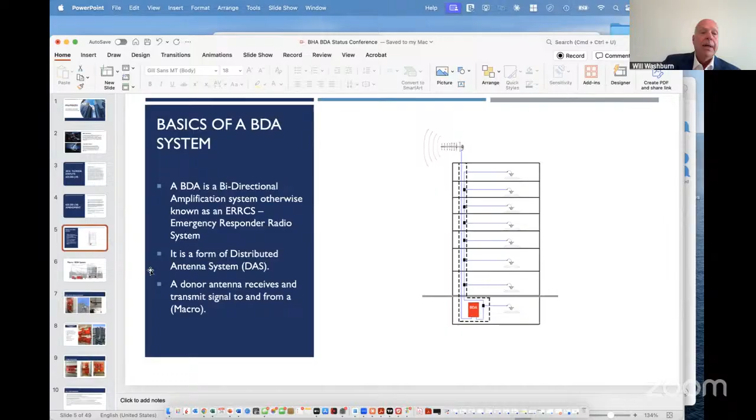So the BDA system distributes antennas throughout and has a donor antenna on the roof that communicates back and forth to the macro system, or what we refer to as the municipality. And it is bidirectional. The signal comes in through an amplification system and is distributed through antennas that are placed throughout the building in a lot of your critical areas like elevator hoistways, stairwells, fire pump rooms, fire command centers, and what have you. So the system operates on a bidirectional basis.

It is not a peer-to-peer system. So if multiple firefighters were in a building, all of their transmissions actually go out through the donor antenna to the macro and then back to maybe somebody on another floor or fire command or somebody outside the building. So it's a seamless communication hub that allows our first responders to communicate inside these buildings.

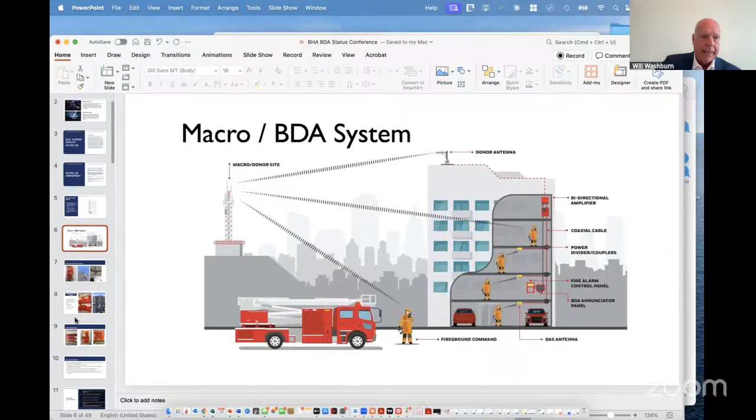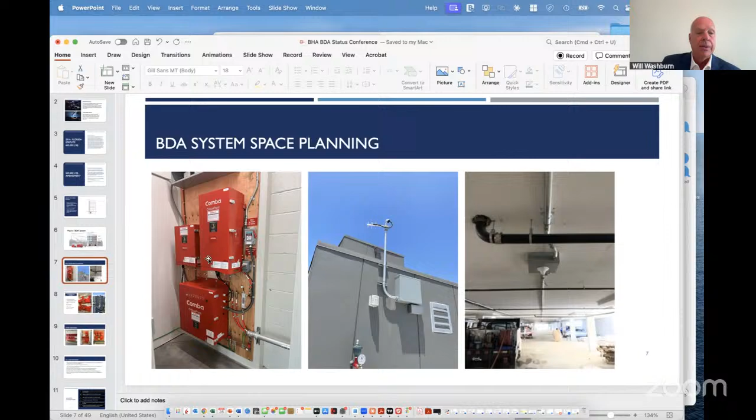And this is what it looks like. This is some of the equipment that's installed in your head end. This is your little donor antenna that communicates with the City of Miami or Miami-Dade County or Miami Beach's communication system. And this is an antenna per se in your garage. And it takes different complexities.

For instance, when we did Icon Brickell, you can see the head end. It required multiple systems because there's multiple towers, and it's what we call a fiber DAS. But it was just a massive undertaking. The building's 3.8 million square feet. We put in 14,000 feet of coax, 16,000 feet of JPLR coax cable, antennas, Yagis, hoistway coverage. And so these are very intensive infrastructure, and there's a lot of code surrounding how we can install this and what kind of fire ratings our pathways have, as well as what kind of signal strength is required throughout the building.

So I know a lot of you folks are returning customers, so I'm not going to spend a whole lot of time on the structure of the bidirectional amplifier. As my message today is, let's talk about what's changing. We've done a lot of these installations, but there's still quite a few left. But there's also a maintenance and monitoring requirement that we continue to be engaged in with our customers to make sure that these systems are performing to the stature that the city requires, as well as not interfering with their macro system. Because if one of these BDAs did interfere with the macro, it renders the system inoperable for any.

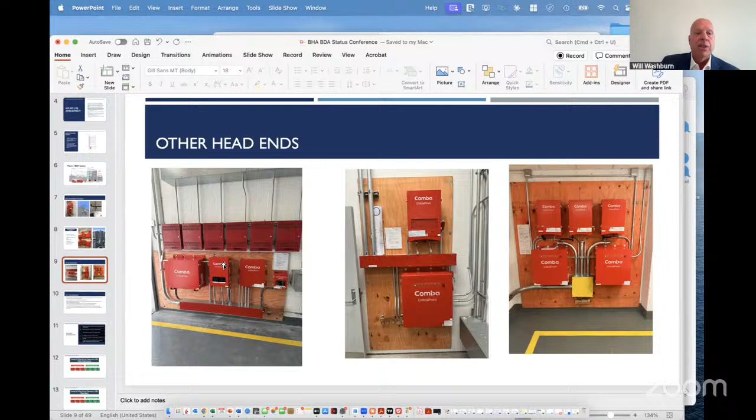And because this is life safety communications, we really need to pay special attention to interfering with the macro, and that's where a lot of the change is. So let's get right into some of the code revisions. Now, whether you had your property mitigated or not is a discussion of code compliance. But once you complete the process, there is a maintenance and monitoring requirement that we're going to discuss here today because it's getting stricter. But here's kind of a broad brushstroke of the code revisions that I think are worth mentioning.

The City of Miami, Miami-Dade County, and Miami Beach are starting to cite those who are not in compliance. Now, if you get cited, they're going to fine, and you're going to be required to go in front of a special magistrate to discuss why you're not in compliance yet and what you're doing to get there. They didn't do it last year. So they were giving folks leeway to get proposals from multiple different vendors, find the capital to fund the infrastructure, and actually institute the build. So they've been very flexible.

That's changing. They're all now out banging on doors, finding out if you have a compliant system, testing in your lobbies and your elevators. City of Miami's not even announcing it. They're just coming out and going through the building independently to try to determine whether the building has a system, and if not, why, and furthermore, if you do, they're testing it.

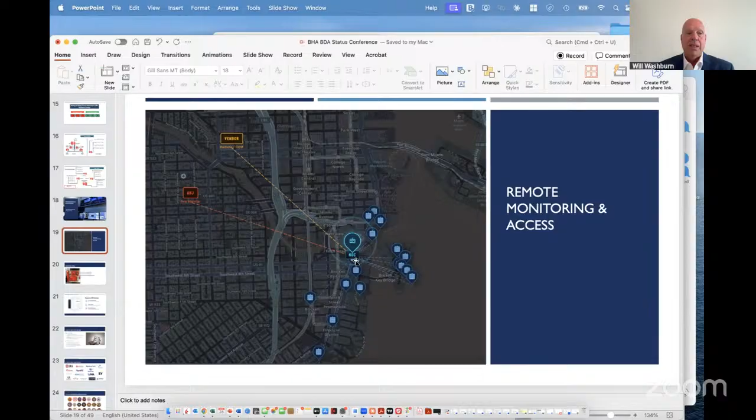And it saves their network from being out of service for that amount of time, while they used to run around to each building with an Anritsu and a Yagi trying to find the interference. So this is one of the big drivers of why they're making this mandatory, that if you build a system, you have to install this little item. And this is over here at Bristol Tower. This is one of our beta sites.

So one of the new requirements is that when we build this, you, the building owner, have to bring us a network circuit, which is a 100 meg network circuit. We originally rolled these out with wireless access, as you can see, but they weren't as consistent as possible. So they want these to be hardwired into the circuit. So it's a pretty innovative requirement that they're enforcing.

And we like it. We think it's good because it gives us more control over all those buildings that we built, and we will get notice immediately if there is an alarm or if there is interference or oscillation. But more importantly, it's going to tell us, hey, this property is coming up for the annual inspection on June 16th. Your annual grid test is going to be due.

Please conduct it and upload it to the document repository. So that's a big part of this because the city didn't have a document repository. So it's a benefit, but it's another cost.

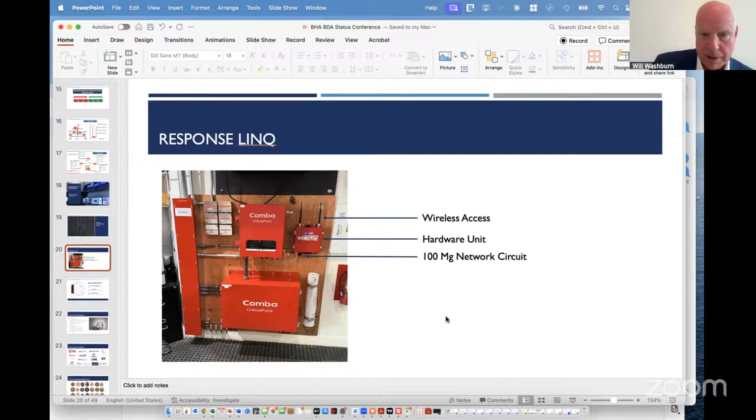We charge a premium for our maintenance and monitoring, but we're doing the work. We're doing the annual grid test and we're doing all the things that are required. So a lot of buildings are out of compliance because they really haven't done those annual grid tests. And so this is the most significant change coming down the pipeline here. And we've got several months for compliance, but it's an addition. And as Roberto said earlier, this is not grandfathered. I can show you here. Everybody see that?

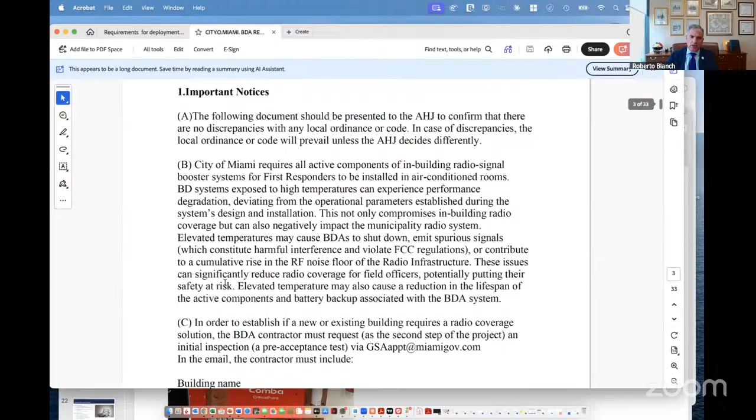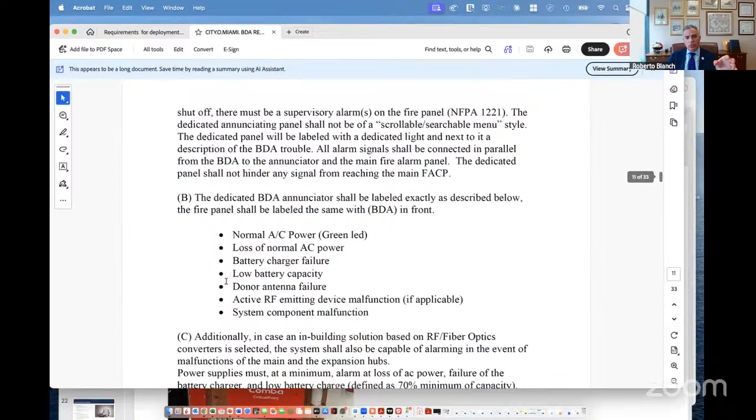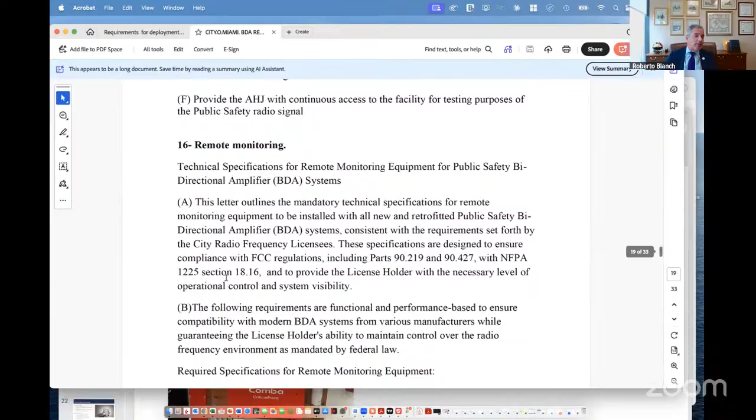While you're showing that, Will, I also recognize one of the things you mentioned earlier, which is that some of the AHJs are beginning to enforce compliance. And we've seen this before, right? I mean, many years ago, when we had the recertification requirements and buildings would not timely comply with them, they get a notice of violation. If the building doesn't comply, then they get sent to the special master or to the unsafe structures board, depending on what the authority having jurisdiction has.

And in the worst case scenario, in a lot of these types of issues, municipalities can impose fines. In theory, if the building is considered to be unsafe for occupancy, God forbid, they could even shut the building down. It's not my experience that municipalities are in the business of shutting buildings down and kicking people out. But it is important for our listeners to know that in some unique set of circumstances, that is a possibility.

And I have been seeing as of late more of a trend by the municipalities to start enforcing a lot of this, and to start getting buildings into that special master track where they're being forced to appear at hearings, provide progress reports, provide hearings to demonstrate to these authorities having jurisdiction that the associations are moving in a path toward compliance.

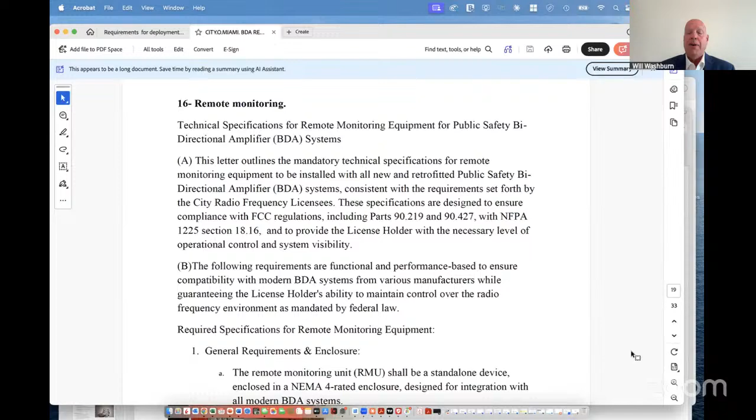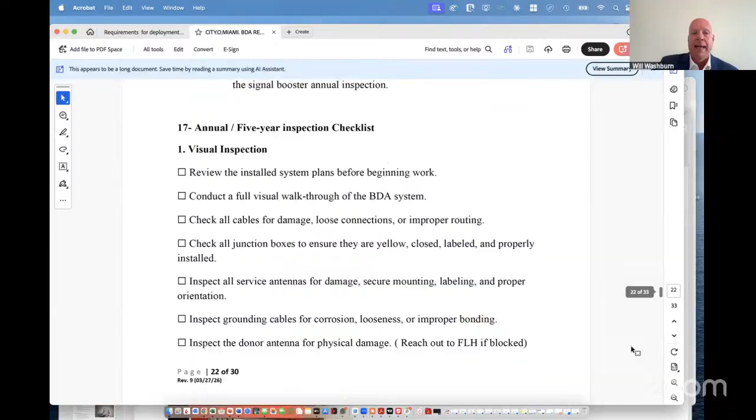And what's happening on that front is they all attend this conference up in Orlando, and they're all comparing notes. It used to be Broward was the toughest jurisdiction, and they started sharing their notes with everyone. So they're coming up the glide slope of compliance on this. But this right here, this remote monitoring, occupies 4 pages in their latest code compliance. And look at the inspection requirements. This has to take place annually, and they have to do a 5-year inspection.

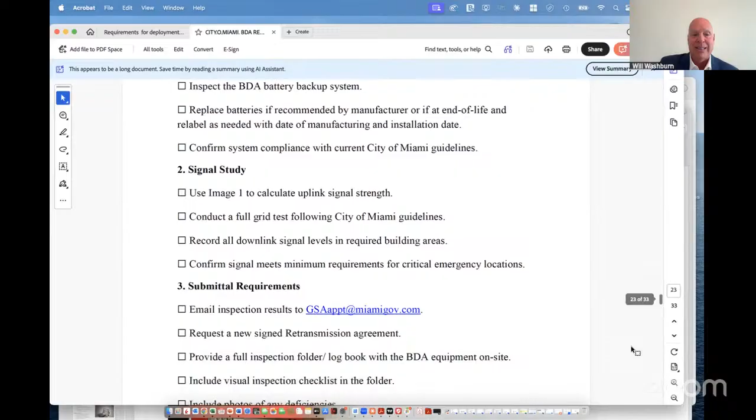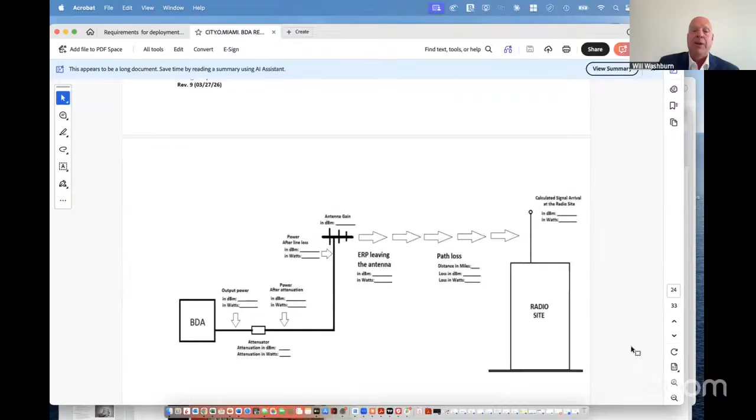So not only is it coming up to compliance on getting it built, but maintaining the system. Look at all this required. And by the way, this is best practice. This is what we've been doing since the onset. We actually set the standard on this because our goal is to keep it from interfering with the macro and doing its job, which is seamless communication when a first responder has to come into the building for an emergency. So you're absolutely right.

These are costly items, but the marketplace in Florida is quickly becoming one of the tougher jurisdictions regarding enforcement on this. Where before, back in 2016, 17, 18, and 19, they were a little lackadaisical about it. Those tough compliant markets were reserved for San Francisco, California, and Seattle, Washington. Miami is taking the lead now. So they're taking it pretty seriously.

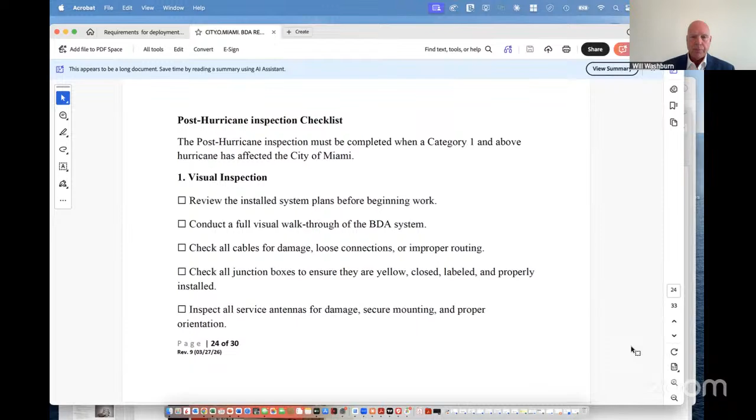Another thing, while we're on this subject, is I've had board directors of property and property owners say to me, Will, we don't have the budget. We'll do this when we get fined. Well, that day has come. So if you're one of those holdouts, certainly get engaged with the contractor immediately because it is going to result in fines and citations and special magistrate meetings.

So it is upon us, and the fire department's taking lead here in the city of Miami, and this is one of their initiatives that we think is good for the industry because it's protection for the first responders and allowing their communication systems to be unfettered by the activity that the legislation required to build all these BDA systems. When you get a concentration of these, if they're not engineered perfectly, they can even interfere with each other. So this is all real time enforcement actions that are happening.

And we as a builder have to deal with this every day. For instance, in the city of Miami, we didn't used to have this equipment in a conditioned room. Now it has to be an air-conditioned room. We're putting mini splits to accommodate. Wasn't in the original bid, wasn't in the original permits, and so forth. So I think the thing that you stated, Robert, was there's no grandfathering here. This is a dynamic requirement, and we're going to have to pay attention to it and make sure you're compliant every year.

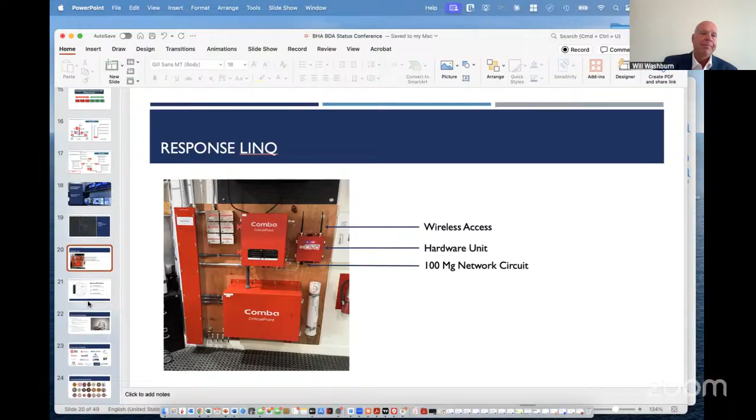One of the other changes is up to the authority having jurisdiction. So originally, the National Fire Protection and International Fire Code had the threshold of passing at -95. What that means is it's the relative strength of a signal, and it's measured in negative numbers. So -95 was the threshold. If you were -95 or better, and you did a grid test and all your grids are green under that threshold, you pass and you don't have to mitigate it. If not, then you have to put antennas where it's not passing and mitigate those areas.

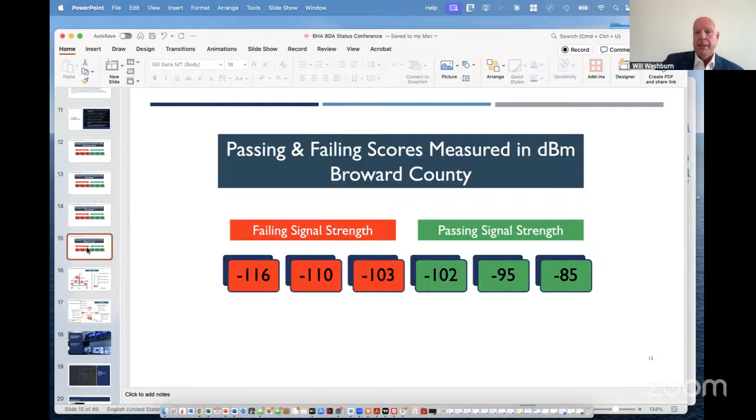-95 was the standard nationally. City of Miami, however, raised their threshold to 105, which is in the building owner's favor because their radios work all the way up to 104, 105. So they put their threshold at -105, not the national standard at -95. This benefits the property owner because you would have to mitigate less of the property because of that signal strength threshold being expanded to 105. Broward went to 102, but Miami-Dade and Miami Beach are still in the -95 threshold. So different standards apply to different jurisdictions.

Just note that when the fire department comes out to test their radios or the radio shop comes out to test their radios in the jurisdiction, if they get in an elevator and it bonks, you have to mitigate that critical point. So you have to build to the standard that's required in the jurisdiction, but at 105, there's still a potential for that radio to bonk, which means it can't lock onto an antenna to get a transmission out. It usually happens in either a stairwell or an elevator. So we still build to the best practices in our business of -95.

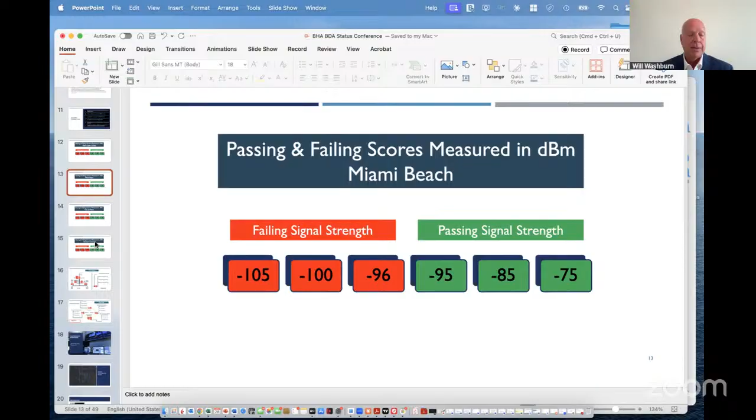But those are some really important changes that have transpired in the last 2 years that really impact the cost of mitigating these properties as well as the form and function of executing a contract and delivering the coverage. Well, it's 98 or 99% coverage required in the critical areas and 95% in the common areas. So just note that the jurisdiction has the ability to augment these, and Miami City did, but Miami-Dade and Miami Beach kept the same national standard.

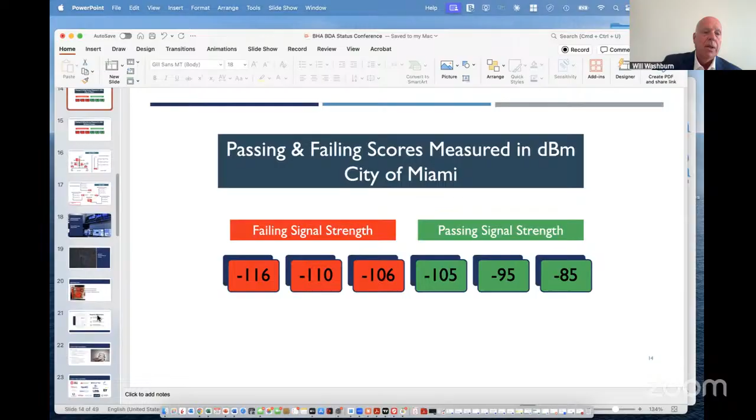One of the other things I want to talk about, and this is why some of our property owners have not been able to build these systems, is they don't have the budget for it or don't have the capability. You know, some of these buildings have a lot of homeowners on fixed incomes, and they don't have the ability for these big assessments, and they're getting hit again with several assessments with SIRS and restoration and concrete restoration programs and higher insurance costs and everything else.

One of the things that we introduced, I think it was back in 2022, was instead of you having to pay for it all up front, we built an OpEx model. We will come into your property and build the system. We'll own and operate it. For that, we would ask for a subscription fee for the 10 years that we own and operate it, 120 months. So you could put this in your OpEx budget and make it a little more palatable as opposed to coming up with $300,000, $400,000, $500,000 to mitigate one of these properties, in some cases $1 million up front.

And it's been pretty successful. We've done 14 BDA as a service where we pay to build the system and we own it and operate it and depreciate it over 10 years in return for a monthly payment. And what happens at the end of that lease is we sell it back to the building for $1 and continue to maintain and monitor it. So this shifts it from the capital expenditure budgets to the monthly OpEx budgets, and it's a little more palatable.

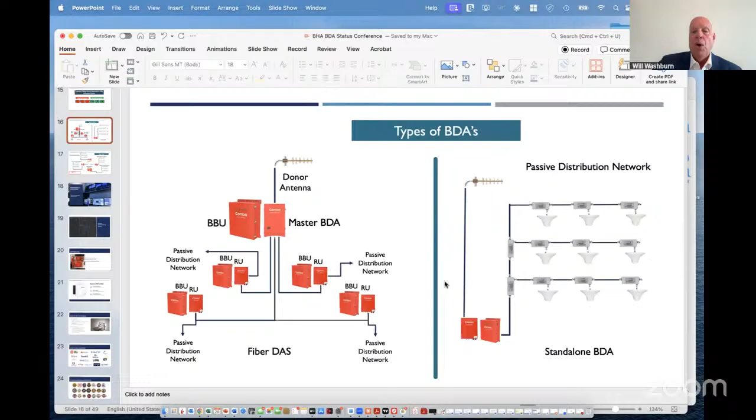And lastly, I want to circle back around about this fiber DAS concept, because a lot of you folks are getting, and this is mostly in Miami-Dade County, pushback on building your own standalone system. And I just want to spend a few minutes about what that structure looks like, how it's different, and how it's required. You're required to be compliant by putting in a campus-wide solution.

So a standalone has its own donor antenna on the roof. It comes down into the BDA and it distributes through the distributed antenna network throughout your property with antennas in your hoistways, antennas in your stairwells, antennas in your common areas, and it's bidirectional. So if a firefighter comes in, he transmits, this antenna picks it up, brings it back out to the donor. Now, you can see that this donor antenna is not big in form factor, but it is the most important part of this because it's where the signal comes in and goes back out.

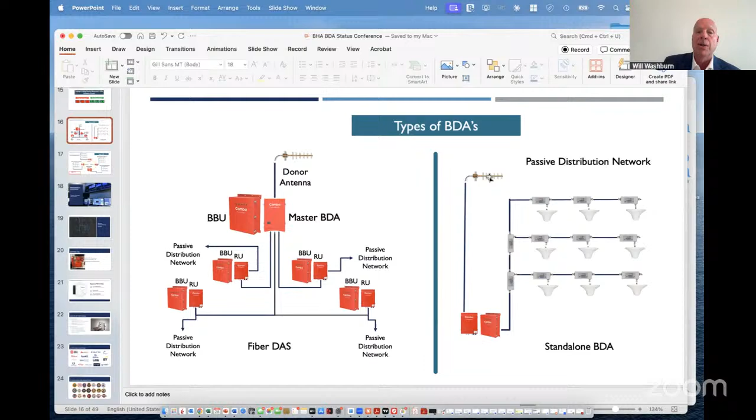If it points across a building and it hears one of these distribution antennas, it can go into a circular loop and create interference. Now, let's add to the fact that you may be a two or a three building concentric building that's built on a common podium, and you have three different associations, and these associations are independent and want to put their own system in. If I put three standalone systems in those properties, the opportunity for interference is a lot higher because now I have three donor antennas. Whereas a fiber DAS solution has one donor antenna on the roof.

In the case of Icon Brickell, it's on building one. And then there's a master BDA that controls everything. And then each building gets its own remote unit. Okay. And then each building builds out its own passive distribution network. And so why is this better for reducing the potential for interference? Because I have one donor antenna, and this is all on one system. So I'm not going to interfere with my own distribution antennas that may be in a garage.

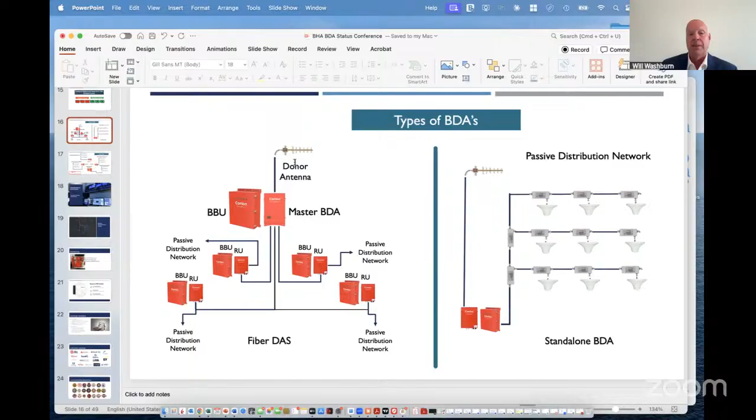So isolation of this donor antenna, which is paramount for communication, is reducing the potential for interference in the building itself with its own system, as well as the macro system from the municipality. And this is how it looks. So each building would have its own passive network. Each building would have its own remote.

And it all communicates to the master and goes out through one donor antenna. Will, it continues to impress me how there have been updates and modifications, and you've stressed this from the beginning of the presentation, which is how dynamic of a process this is. I know we're getting to the tail end of our time here, and I wanted to see if we can give some takeaway messages to those participants that are listening to us now, as well as those who are going to watch the recast of this presentation.

The biggest issue, I think, that both you and I have stressed, not only in today's presentation but also in prior presentations we've done on this topic, is what an unfortunate set of circumstances as far as timing is concerned for a lot of high rises within Dade County, Broward, the more densely populated areas, but also throughout the state, which is the structural integrity reserve studies that have to be complied with by associations, the milestone inspections. We talked about this as well, being another one of the conditions, and also some legislative issues that we now are having to deal with as it relates to the financing for some of the projects like the milestone or complying with the structural integrity reserve studies. And hopefully in this legislative session, they can fix that.